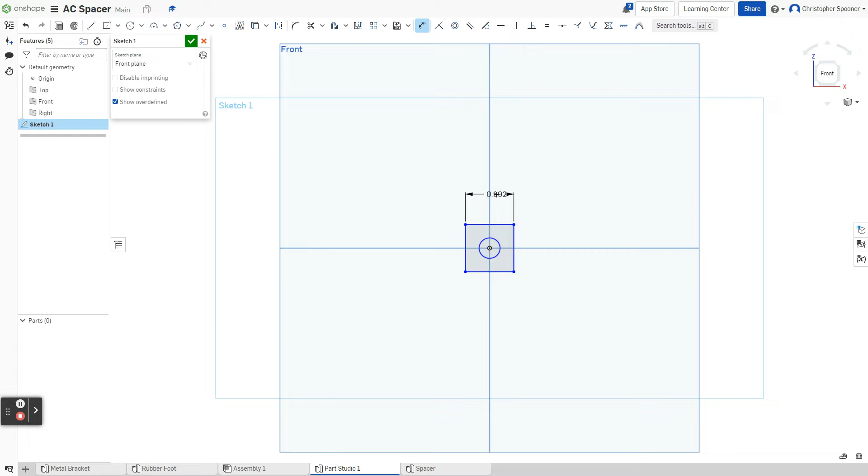The overall size is 0.214 by 0.214. Good, it's a square, so I'm going to use the equals constraint with the E key. And then we're going to start dimensioning: 0.214.

And then the hole in the center is going to be 0.1 even.

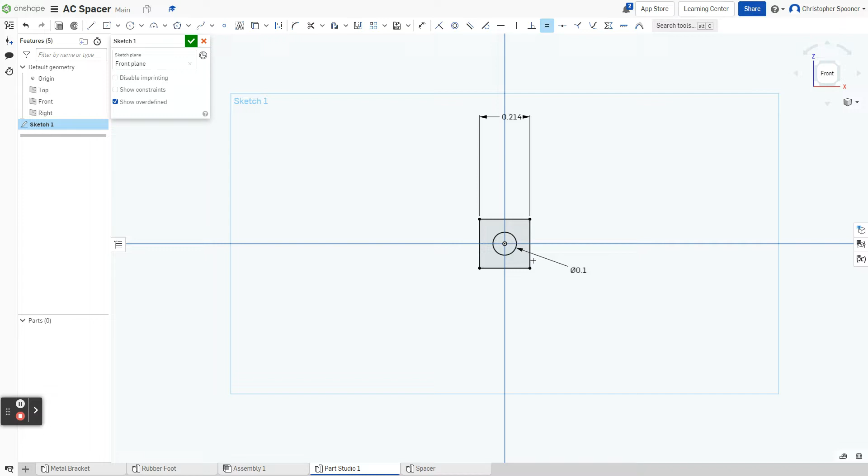Now Shift E for extrude. Tilt it, and the thickness of my square nut is 0.067. That looks pretty good.

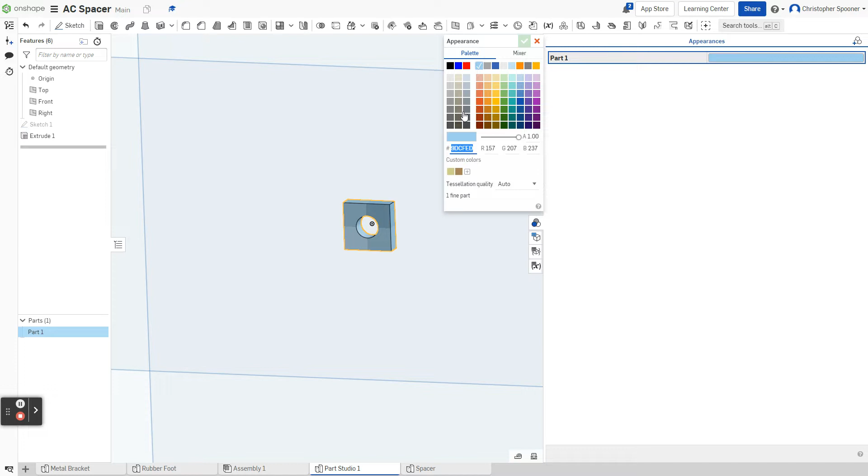And I'm going to make it gray, and I'm going to rename this part studio: square nut. And rename the part: square nut. Now let's go to my assembly.

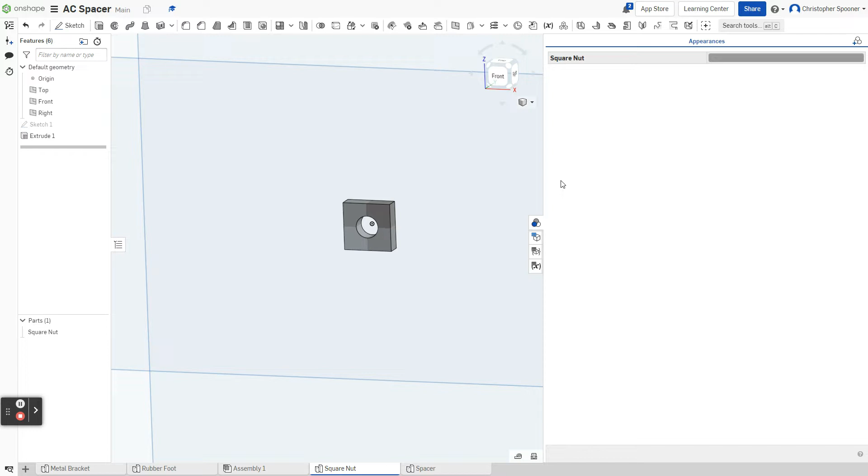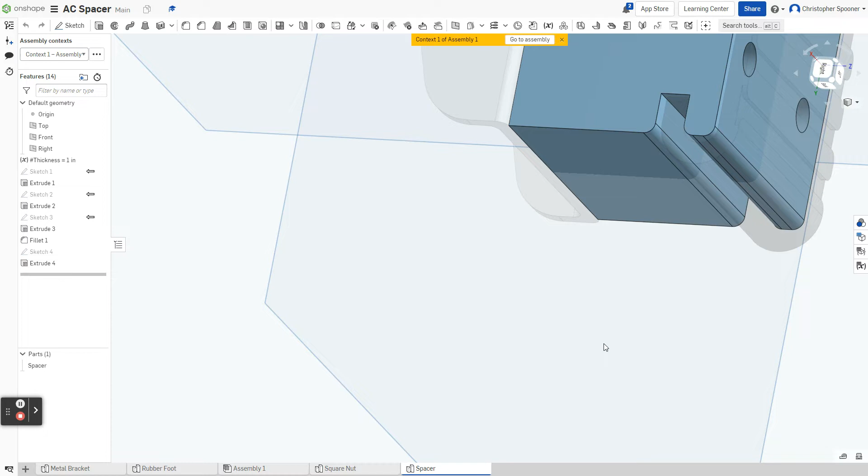We're going to edit this piece in context. I'm going to right click, edit in context, context 1. So now I can see my piece. I can see the screws.

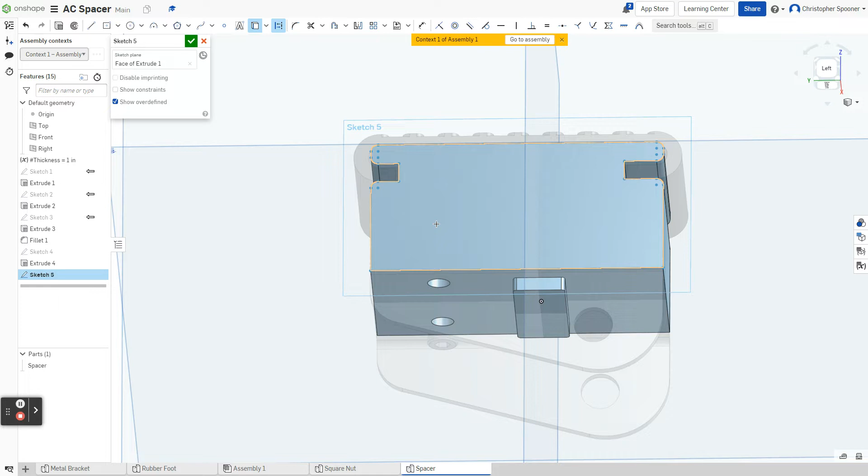So I'm going to start a sketch on the side of here. I'm going to look at the side. I'm going to turn on construction mode, and I want to show... I think edit in context is actually hurting me.

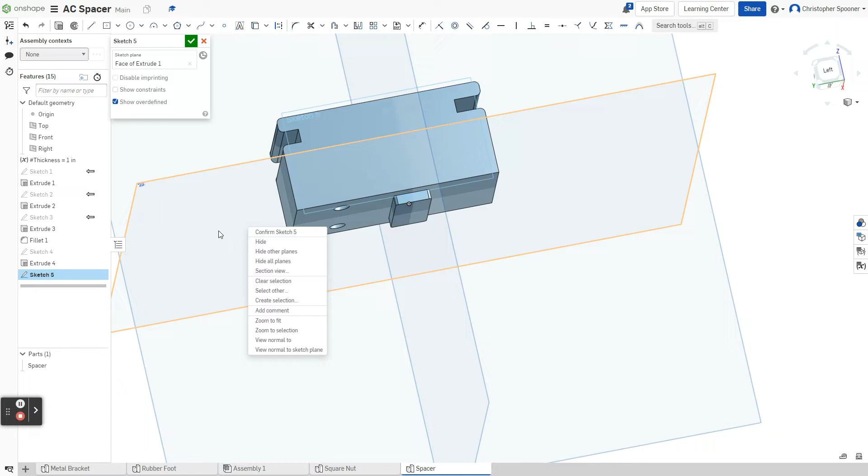So I'm going to go directly to the spacer, and then we're going to go into the sketch. Then I'm going to project geometry, construction mode. There we go. So there's the hole that my thing goes through.

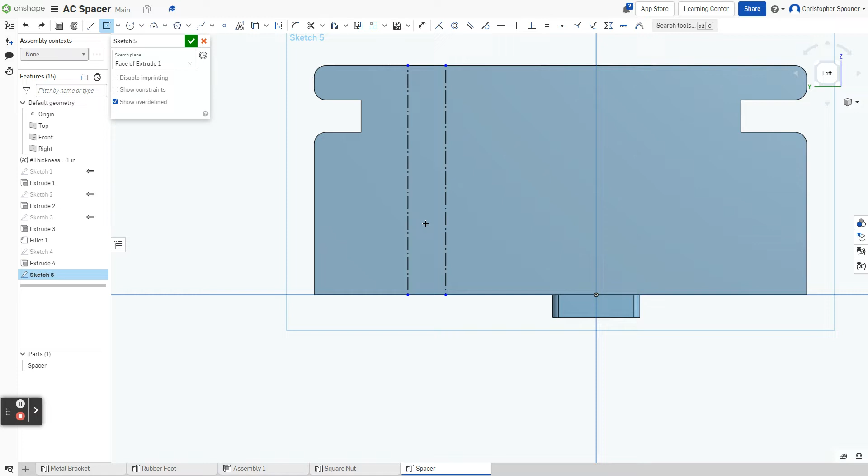I'm now going to draw a... construction mode. Okay, I'm going to pull this dimension just to see what it was: 0.161. I'm going to dimension from here to here to be 0.161 divided by 2.

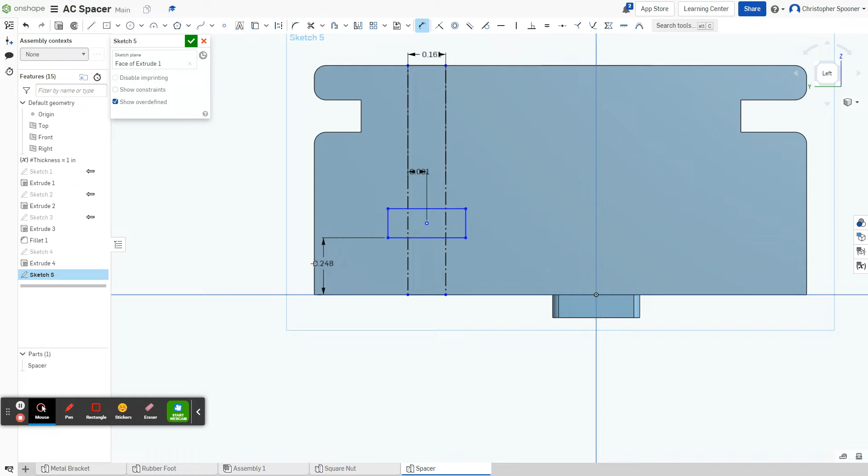We need to say this is going to be... we have about 12 millimeters. So I'm going to go 6 mm. Let's go 4 mm, so we have a good amount of material.

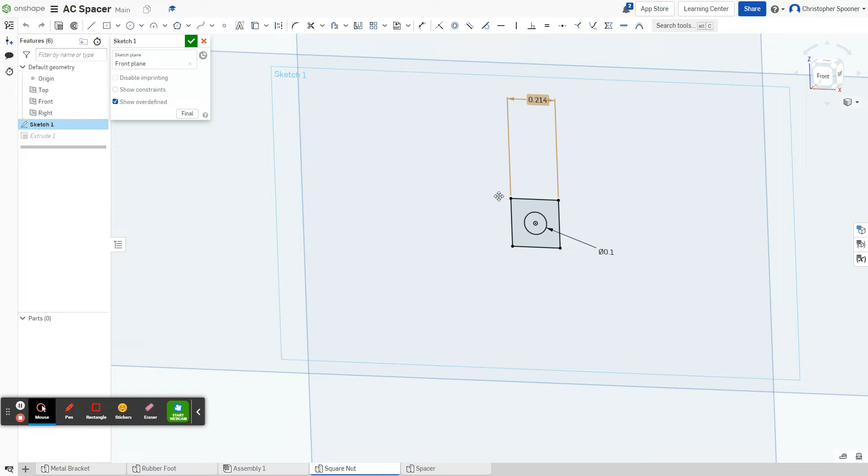And then I need to make this bigger than the square nut. So the square nut was 0.214 in thickness. So we're going to make this 0.214 plus point, oh, no.

So the thickness was 0.067. 0.067 plus 0.01.

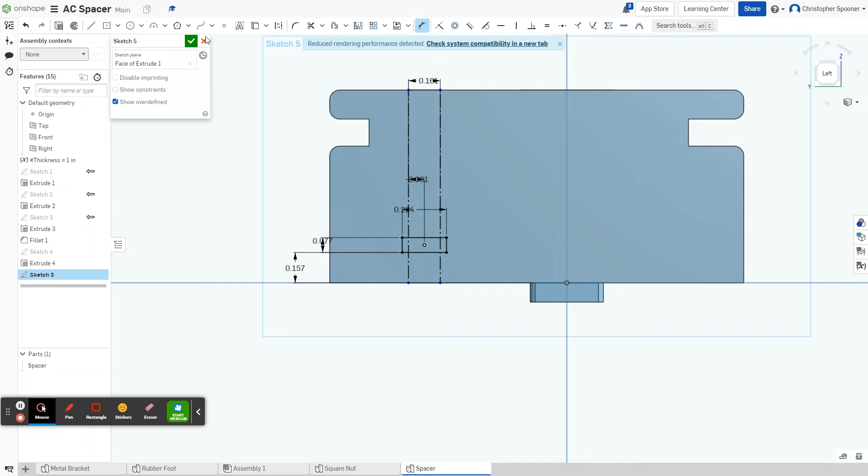And now we're going to take and dimension the width: 0.214 plus 0.01. And then we're going to extrude this.

And now here's the hard part. We know if I take the measurement tool from here to here, it's 0.107. So we're going to go just past 0.107 past the hole.

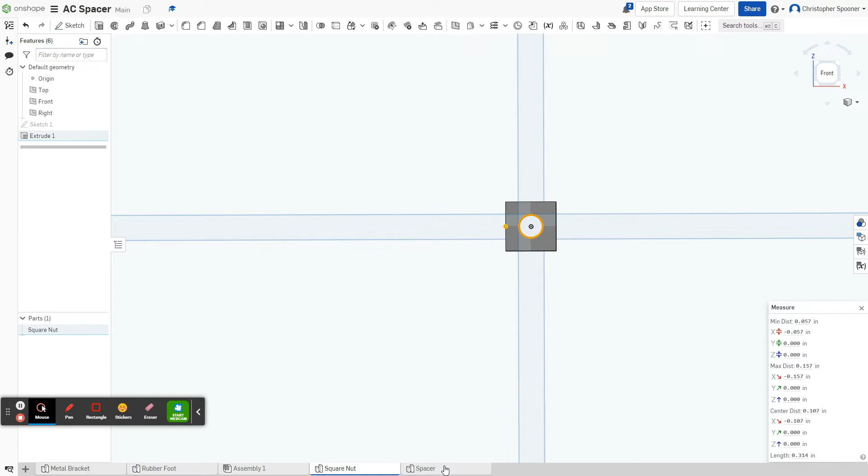Because we want to make it so that when we put the square nut in, it falls in line with the hole pretty easily. So I'm going to measure from here to here: 0.248 plus 0.107, I believe.

So 248 plus 107. So extrude, remove: 0.248 plus 0.107 plus 0.005.

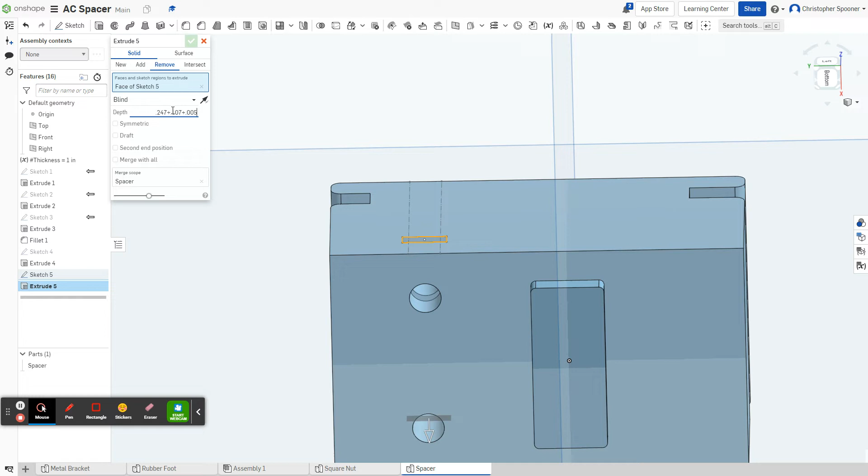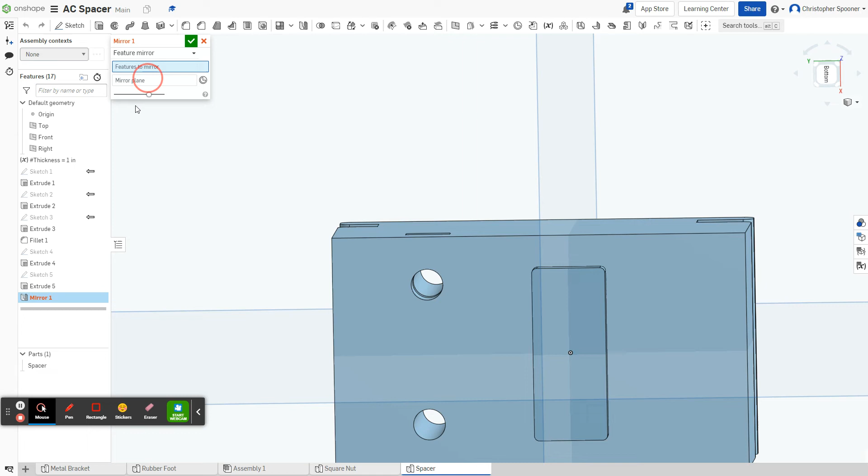And that looks good. We'll double check that in one moment by putting our nut in. So we're going to mirror this feature, this extrusion. Mirror plane is going to be there.

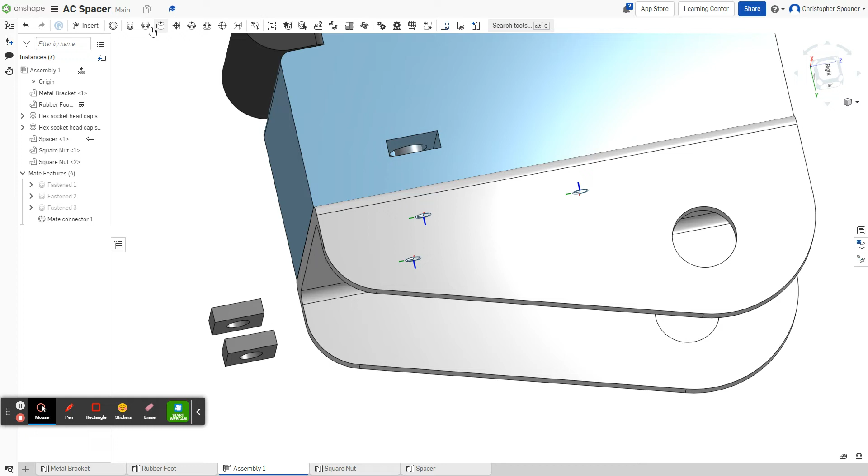Okay, so let's go back to our assembly, and let's put in our square nut. Okay, so now let's do a fasten. Okay, that spot and that.

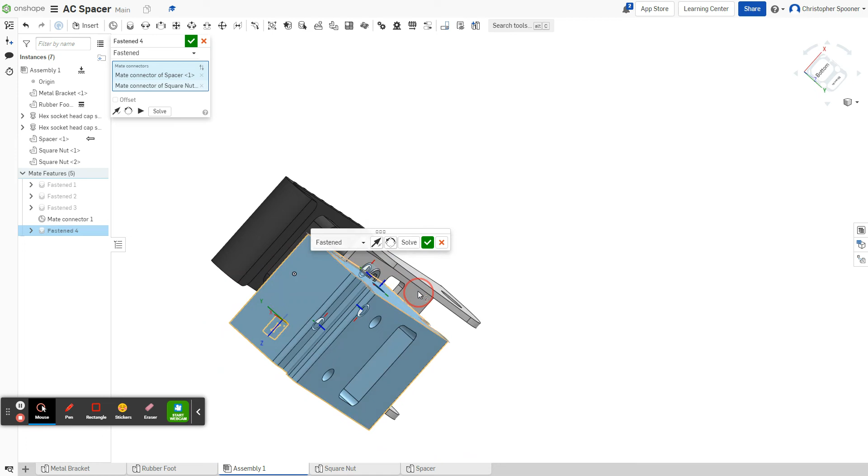We need to switch direction. Check. Put it all back together. All right, let's reassemble that because things unhook themselves. So we will refasten that spot to...

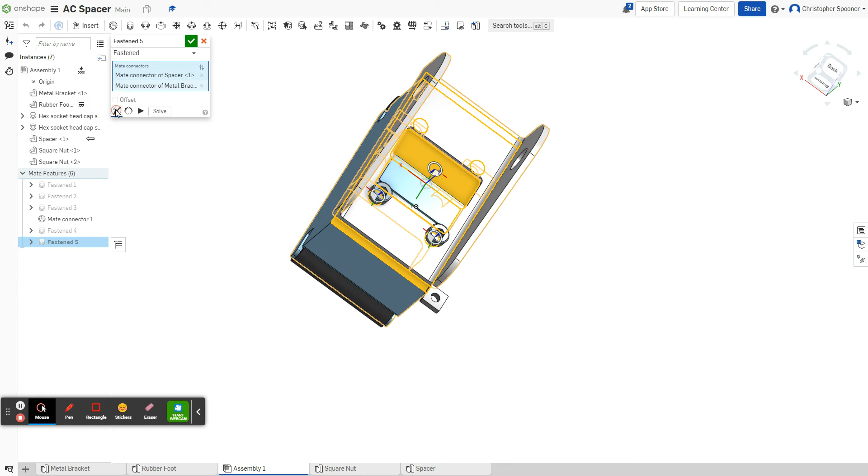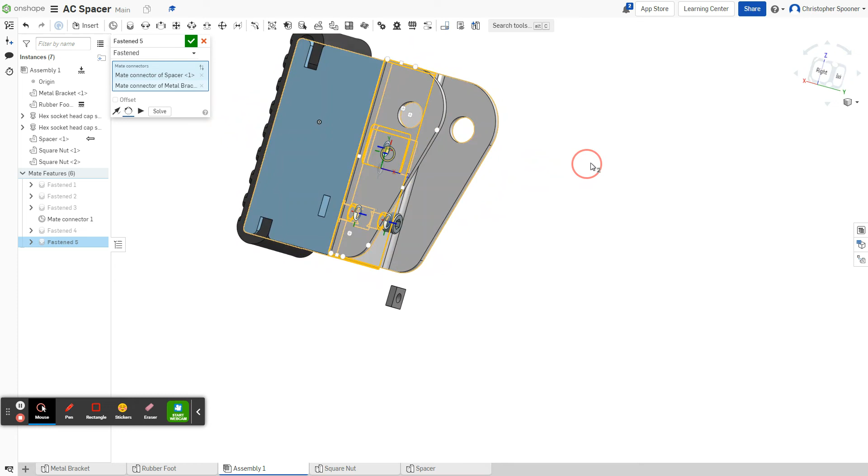That looks better. I'm going to turn this guy's visibility off by clicking the little eyeglass. That looks good, I can see the square nut through there. We're probably good. I can turn this guy back on.

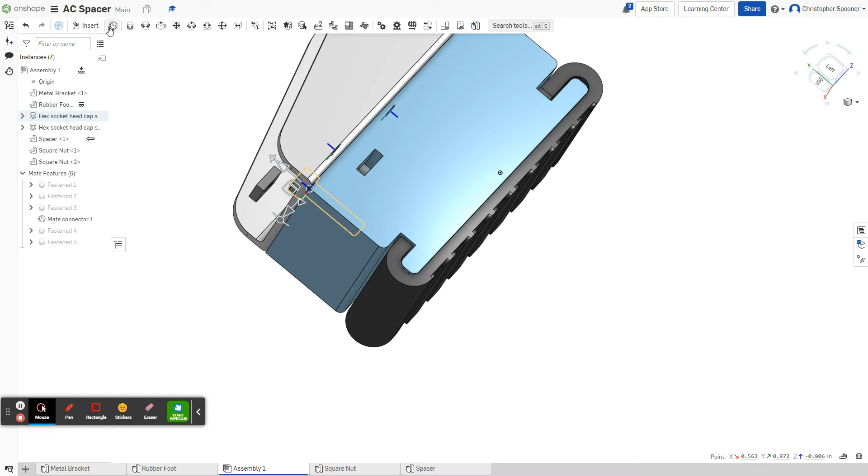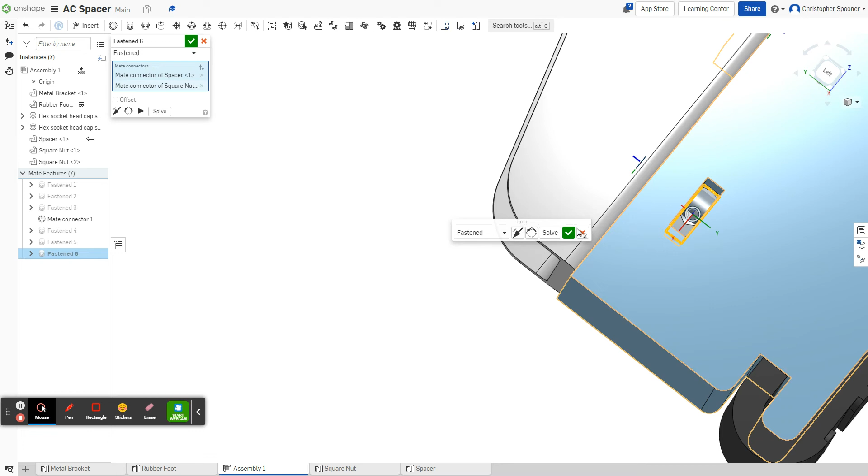I can insert my last square nut. Flip the direction. Yep, there you go.

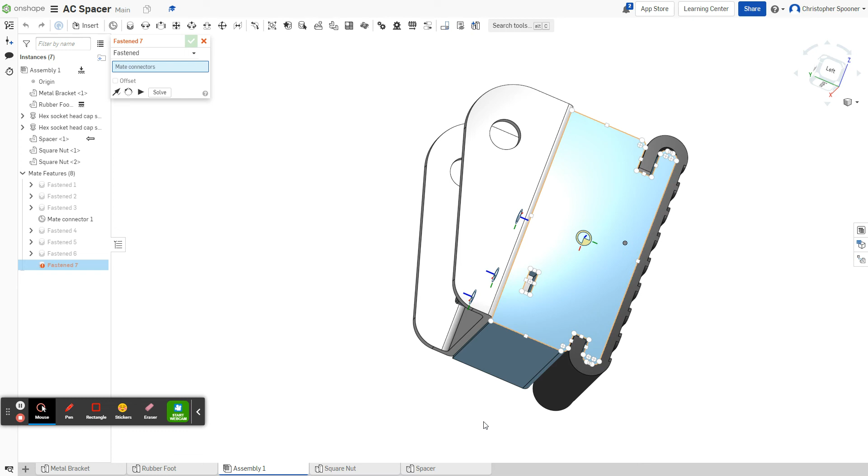That looks good. So really the only thing now is to print it and see how they fit, because I won't know until I actually print it—there's a lot of tolerances, a lot of spacing. So let's take, and I'm going to grab my spacer.

I'm going to right click, I'm going to export. I'm going to hit F11, and we're opening up Prusa Slicer, and let's take a look at how we're going to orient this to print it.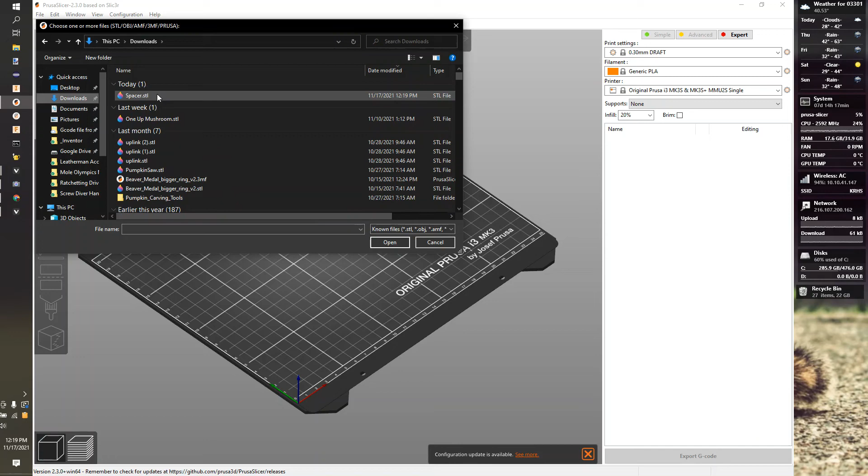I'm going to switch it to the single printer. I'm going to hit the add object. I'm going to go to downloads. And that's a really bad orientation.

Let's try putting it on its side. So it looks like we'll need some support from there. The square nut, I can bridge over that without a problem. I should be able to do the inside of that without too much problem.

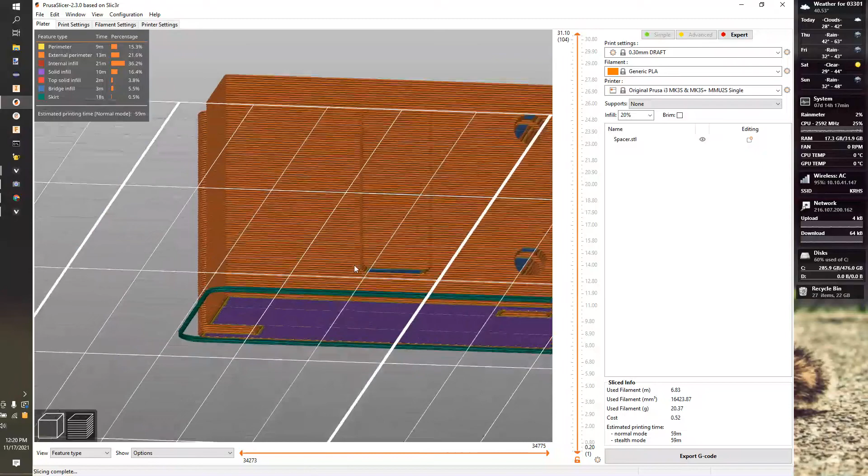All right, I don't want supports everywhere, but I do want to print support that one spot. So I'm going to use a new feature in Prusa Slicer called Paint on Supports. I'm going to select the object, click here, rotate here, and just draw that blue.

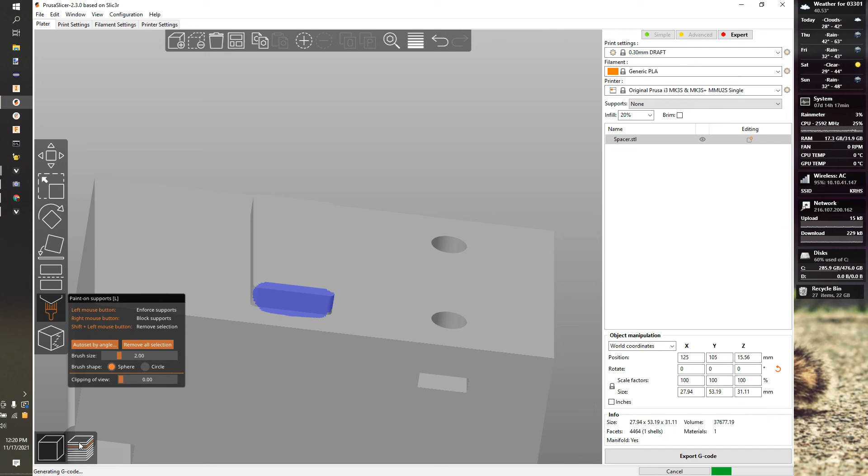Move all that. Let's go to our slice view, and let's change supports for enforcers only. So now I have supports just in that one little lip.

I don't need it for the square nut holes. I don't need it for the screw holes. I don't need it for anything else. One hour exactly—I'm going to print it, and we'll come back and see how that looks.